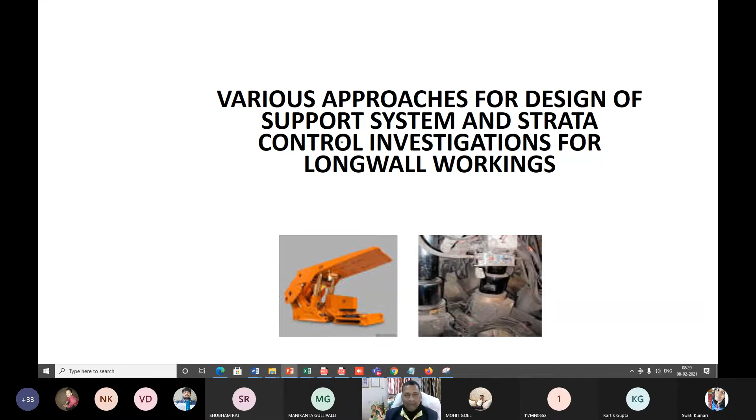I hope you understood. I reiterate and advocate this all the time, so that you get the exact meaning of why we are studying subjects like rock mechanics, geomechanics, or strata control. There are many techniques by which we can design these.

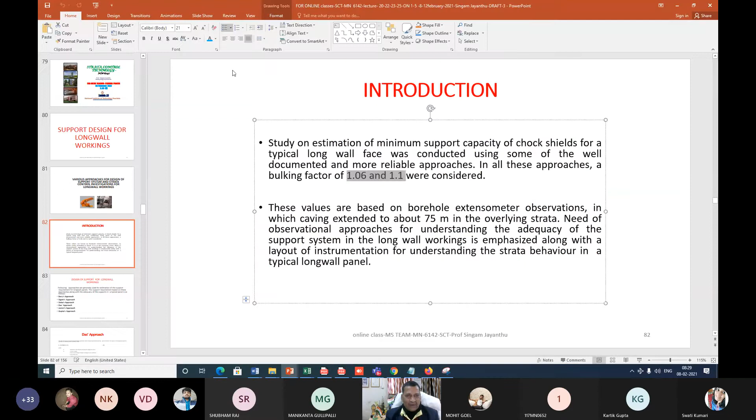But here is the ultimate and main difference. What is the difference between this and other workings, like what you've seen in depillaring workings? There, we considered whether it's rock mass rating or something else. But in longwall mining, whenever there's a problem or an issue of designing the support, it's not like development or depillaring, where there are adjacent panels, adjacent pillars, adjacent remnants, adjacent ribs, adjacent stooks, whatever name you give.

My beloved students of strata control technology, like our Nitesh and everybody, must have understood that meaning—where there are adjacent pillars, they take the load. But in a longwall panel or longwall workings, nothing will be there all along the face; on one side, the total is zero. That means no element will be there.

Everything is being cut—it can be a 200 meter, 300 meter, or 150 meter face length. As the face advances, that is the meaning. I need not draw it again since you already know, as I've shown you with demonstrations. You can understand this: these are the gate roads, this is the goaf, and you are working here. So all the load is supposed to be borne by these elements, or by this face.

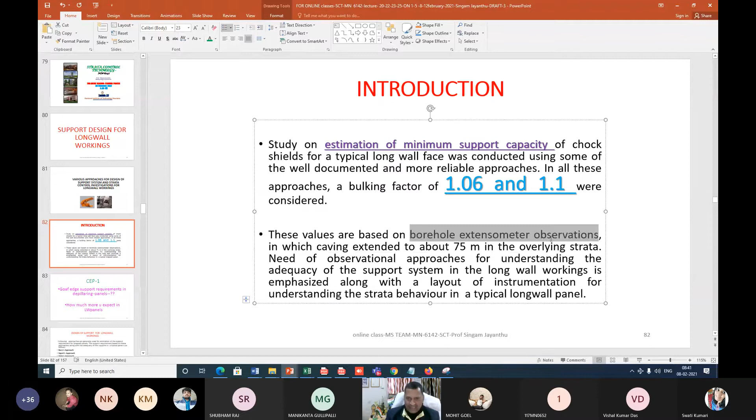Now, these values are based on borehole extensometer observations. You should understand this - these are not just theoretical values or anything, because we have done a lot of investigations on that. Of course, not only us, it was done by so many investigators internationally, and based on that it was observed, and this is what is generally used.

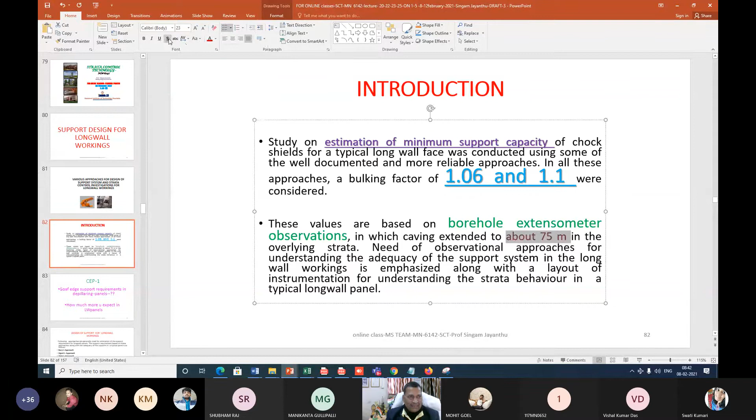Caving height extends even many times, up to 75 meters, when it is around 3 meter height of extraction, whatever it is, observed in different mines. So what is the meaning of this? Very simple to understand now, my beloved students.

Then when I see like this, this is a seam, and then height up to around 75 meter should get disturbed. This is filling this total goaf. That's what is happening. So during that period, at different stages, our chock shield or the support, I told you, will be moving like this, chock shield. Then this is experiencing different loads at different situations of your longwall face, moving face.

So now we should understand that. And when I said bulking factor 1.06 or 1.1, that means that much of load up to that much of height will be acting. Of course, on other sides, there is a side front abutment and side abutment, so many things will be there.

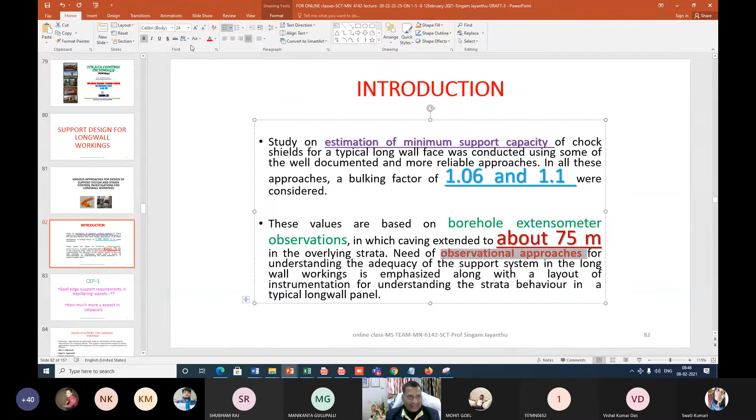Now, and that also we need a lot of observational approaches, and people tried to utilize this. And already I told you, one of our beloved colleague scientist at CMRI, Professor R.N. Gupta Saab, later also he was a director at NIRM, and we were doing a lot of works at that time also. Those things I will be explaining you depending on your interest, of course.

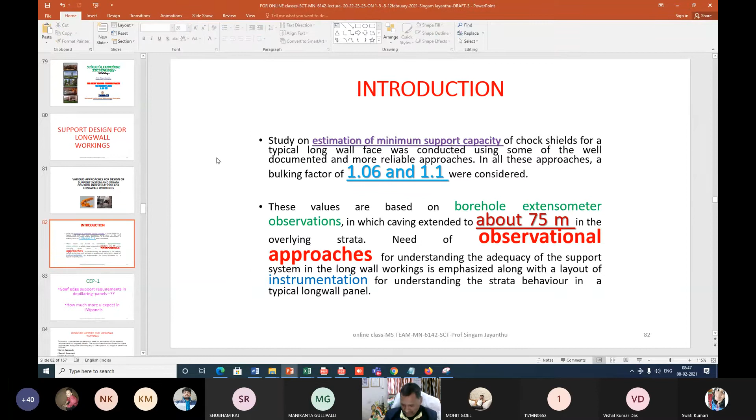But these are all based on observational approaches, utilizing whether it is numerical models and thumb rules, some empirical models developed in other countries, and then a lot of instrumentation done in our country, trying to design or help our industries to give some more better longwall support designs. So with this simple background, let me go a little bit further of whatever already I have asked you.

This is a goaf edge requirement, because in longwall, the main feature is your goaf edge only, right? And these are different approaches that were used. I will not be telling you all these approaches in detail, because I have already given you all these materials, my beloved students.

But before taking a small break, let me show you what materials I have already sent to you. You have all these course materials which I sent as part of a short-term course on recent trends in ground control techniques and organization of strata control cells for mines.

These are all something like books. Of course, at that time we didn't have the habit of publishing in SCI journals or books with ISBN numbers and other things, but this material is there with almost all mining engineers, especially in coal mines.

I have personally given all these course materials to 5-6 subsidiaries, each volume having 400-500 pages, at least 300-400 pages, to so many companies and hundreds of strata control engineers in India and other countries. This one was held during 2012, from 22nd to 25th. All these materials I have given to you, my beloved students.

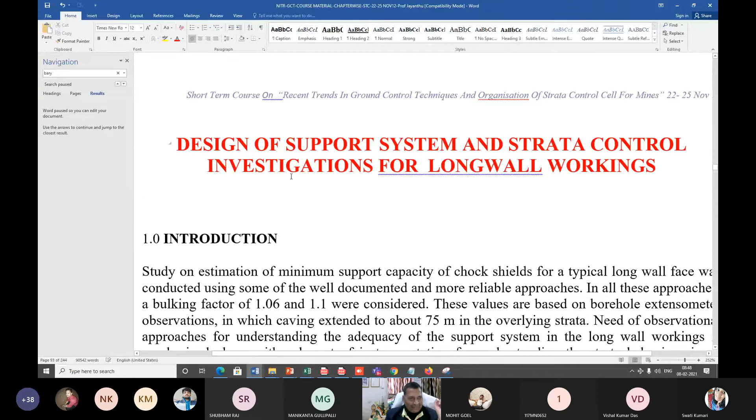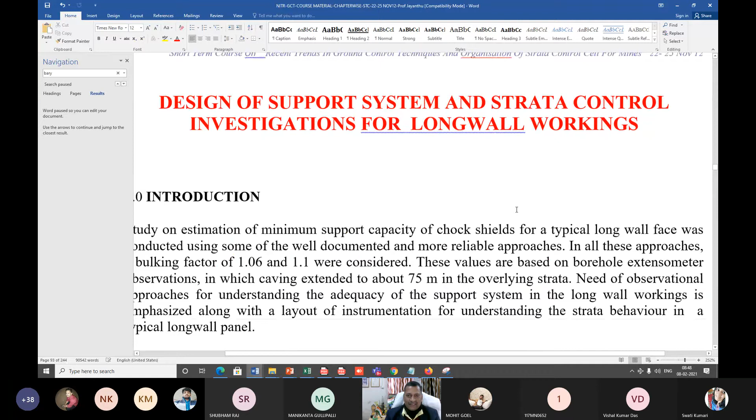Let me also show you the page number, so you can refer to it - this is around page 92, page 93. You can simply refer to this, and it will be easy for us to discuss further instead of reinventing or explaining everything, because you already know how to understand by reading and gaining more knowledge through the literature provided.

Now we concentrate more on interaction, online interaction, even in this COVID-19 period, to understand the present problems of our mining industries. As far as the design of support and strata control investigations for longwall workings are concerned, it is a burning problem for us, a gray area of research.

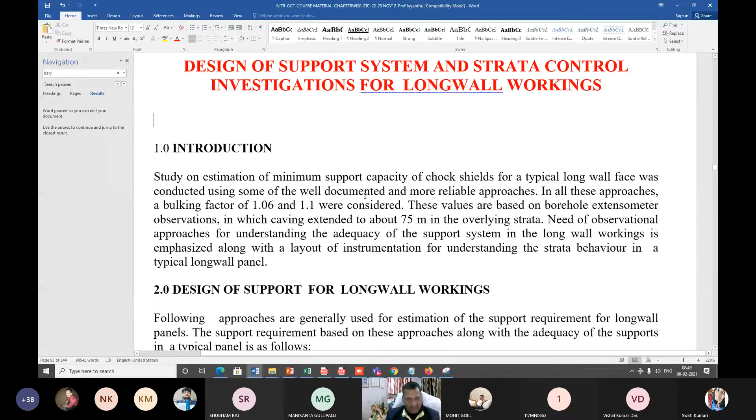That's what I wanted to show before the break. This is what I have given there - what is the Bary approach, its equations, starting from 1969. That's the reason I don't want to go into all these details, but you should understand this as a foundation for why this new research is being done.

Whether it is our premier research institutes like CIMFR, which was CMRI when I was there as a scientist in 1989, or in the 80s and 90s at NIRM - you should understand that foundation.

Then you can do something more, and that's why as part of refreshing you with some literature, I will be telling you, but not in detail. You can read, and if you have doubts, you can definitely ask me anytime. I am available to you, my beloved students.

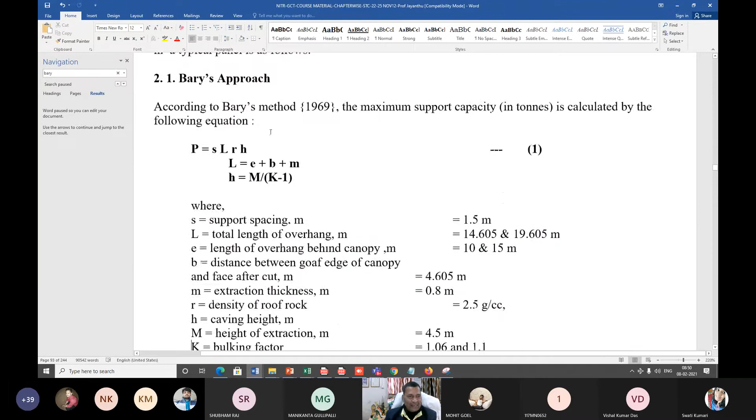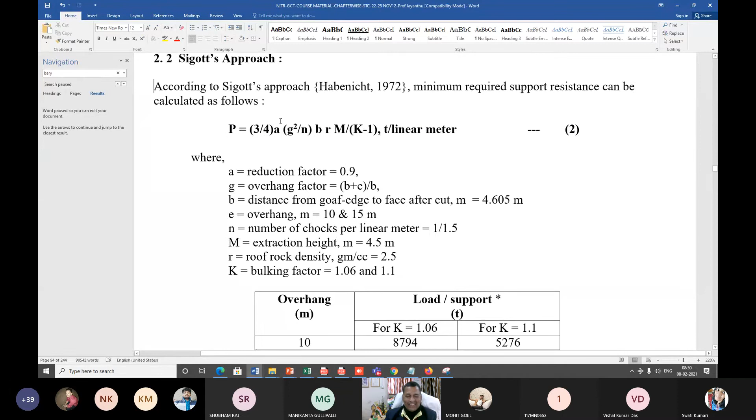So these are different equations already provided from page 92, which I already showed you here, like Bary's approach. You can see I have already given this as part of an international arbitration case study for the Kottadih mines, with some examples. Again, this is not all hypothetical - this is for our Indian conditions.

Some other approaches - Sigott's approach from 1972, then Siska's approach from 1972, and then our Das approach - one of our beloved close friends, Professor S.K. Das Sahab, with whom we were doing a lot of strata control studies in Germany, also at Aachen University. We were there sometime in the early 2000s, right?

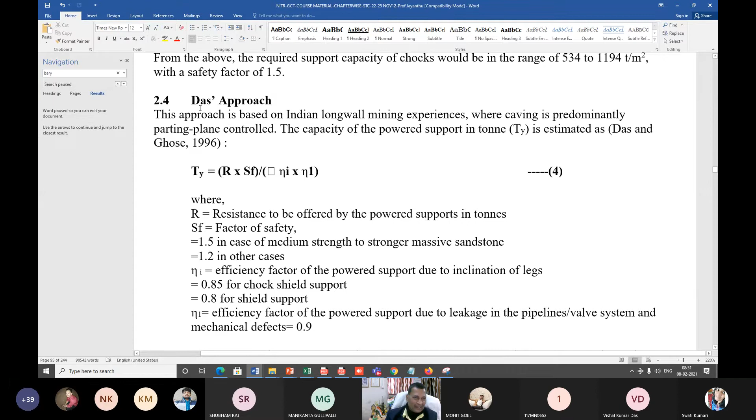He was also the NIT director of NIT Jalandhar. So our beloved friend Dr. S.K. Das, now at IIT Kharagpur, has done very good work as part of his PhD, under the guidance of our professor, the late Professor A.K. Ghose Sahab, in 1996 around that time.

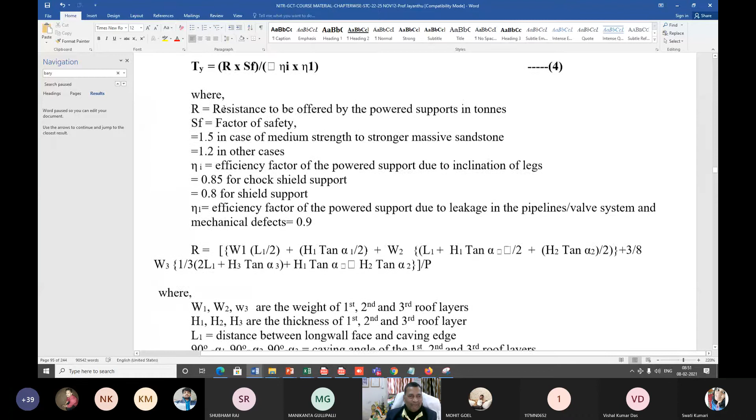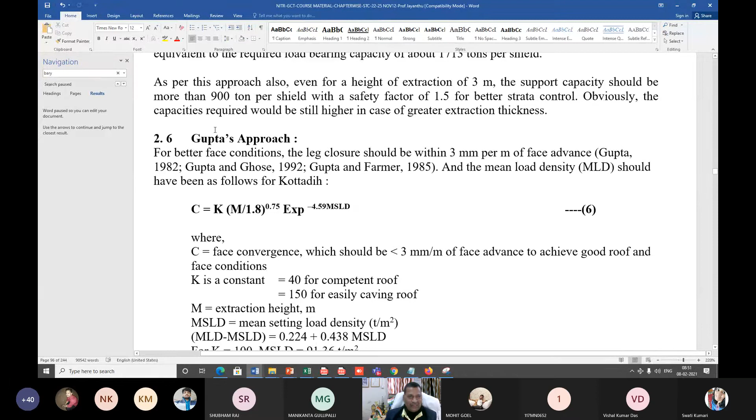So there are many studies done by various people, and other types of approaches like the Joshi approach in '78, and our beloved colleague scientist Professor R.N. Gupta Sahab, who was also director at CIMFR. We worked together for a long time on different strata control and rock mechanics aspects as scientists at CIMFR, Ministry of Mines.

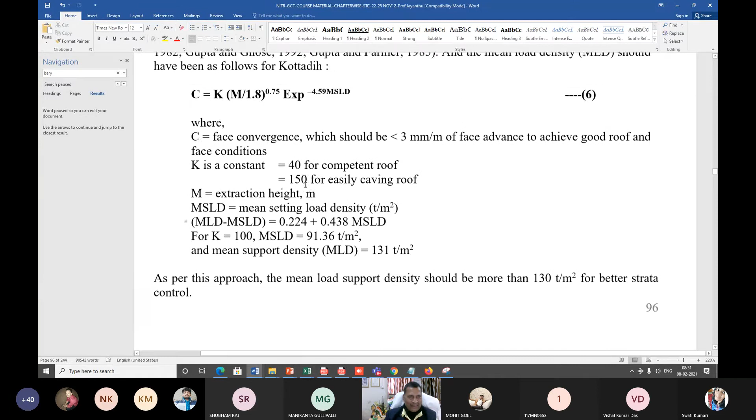All those things are given to you, and of course all these investigations we will take up later, but these are the different approaches we will be discussing. But before that, let us have a small break - any good thing has a break, and that break will motivate us better.

And I could see a very good profile picture of our Deepti Ranjan Acharya. A nice pic, Deepti, very nice.

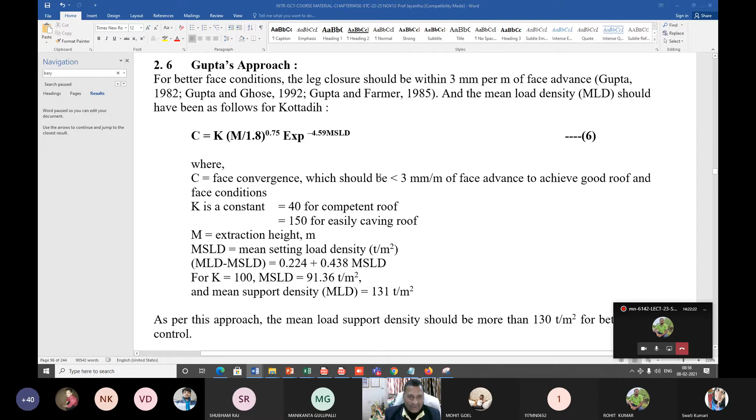Now I am coming to the point of recent information as far as the support designs are concerned. Now you write down about this Gupta's approach, some important points about this. I think now it has come out, otherwise it was moving, rotating here and there. Now it will open, don't worry.

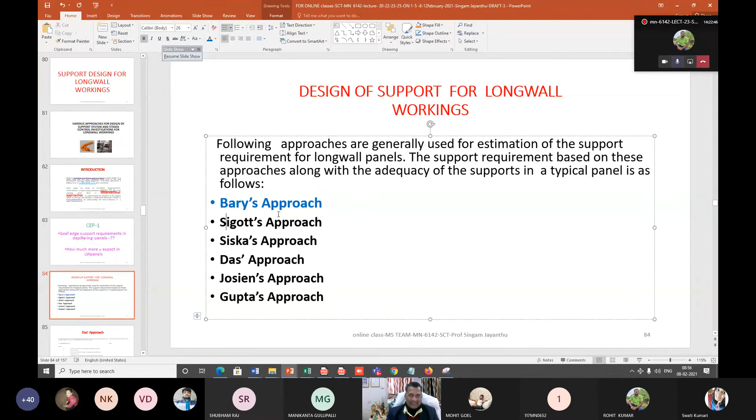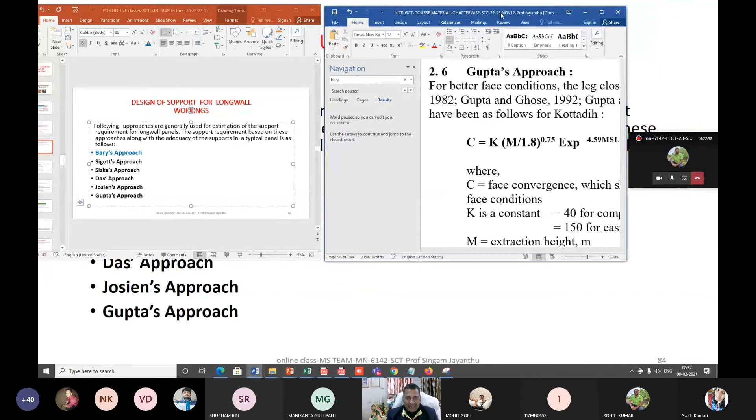So these are the different approaches what we have seen just now - Bary's approach, Sigott's approach, Siska's approach. In all these approaches, as you have seen here, let me keep this information in a different style so it will be easy for us to discuss and collate with the information already supplied to you. Already in the beginning of the course I supplied, and we have hundreds of pages of course materials about this which we conducted in our NIT Rourkela based on the requirements of the industries and DGMS.

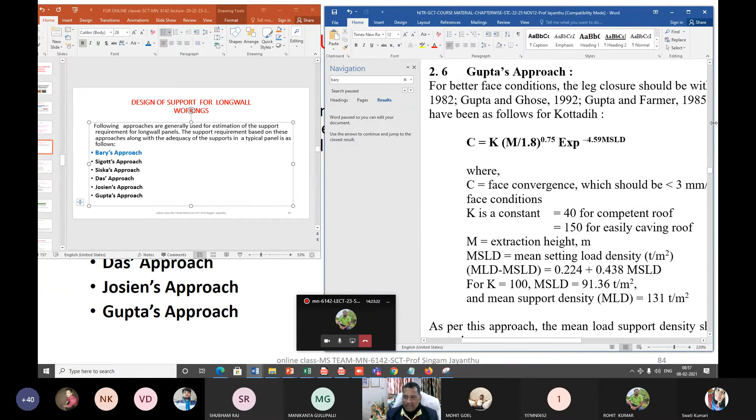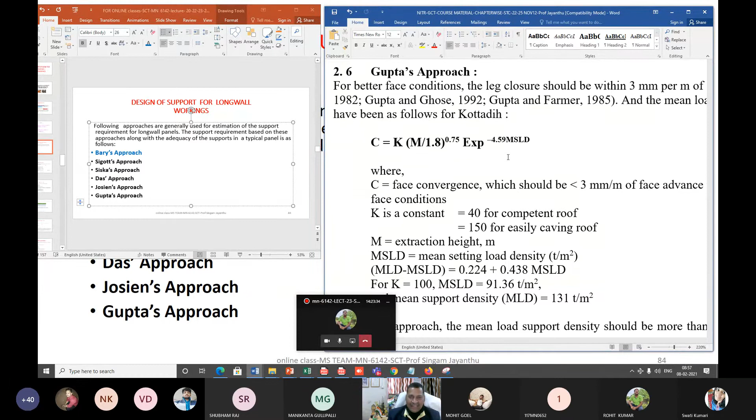Our DGMS recently, Mr. Prabhat was also here witnessing and discussing about these issues for further development of this research or S&T department in DGMS with more insight and reviving that. So that's why I wanted to show this here.

Now in this Bary's approach, Sigott's approach - as I told you, what people thought at that time is it's better when you go to the concept of bulking factor and caving height, up to what height. Bulking factor in turn gives, when there is a panel - if I am keeping it like this, now as a section when you see, over this if it is getting disturbed up to a certain height, then we consider that height to be something like this, okay.

So this much of height in the roof should get disturbed to fill this much of the 3 meter, whatever is 3, 4, 5, what is the height of the extraction. Just imagine, at the time of major fall, instead of like this, this is a total overlying strata and this is my surface. In this, there may be different caving height based on the bulking factor, maybe up to this.

So that's why I folded it here, up to this. This is 75 meter, 40 meter, 30 meter, whatever it is over the panel. And of course, some more height is also there, but that need not get disturbed to fill this gap. That is the meaning of this.

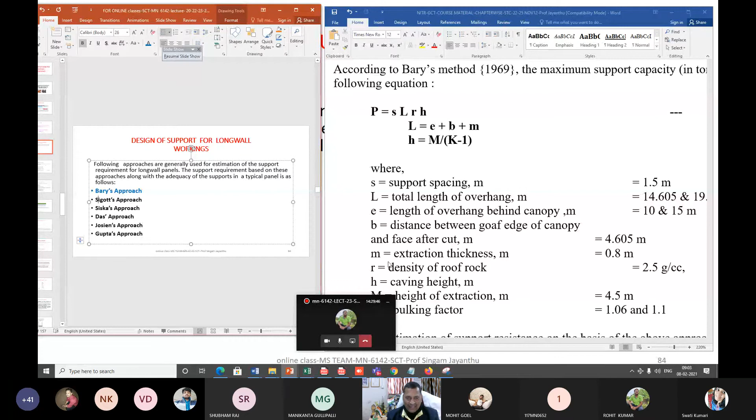Now you understood it, right? So L is the total length of overhang, and E is the length of overhang behind the canopy, and the distance between the goaf edge and the canopy, you understood already, right? And face after cut is around 4.6, that is the meaning of that. And the density of the rock is 2.5 grams per cc, and extraction caving height is based on that only.

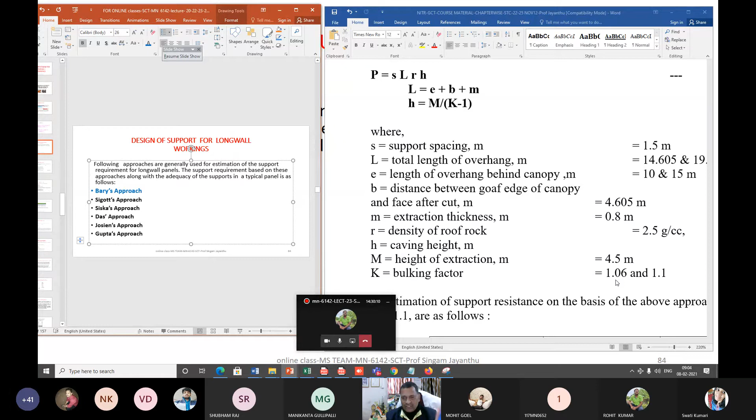Height of extraction for 4.5 meters, then with a bulking factor for the worst situation and the best situation we have given 1.06 and 1.1 respectively. I will explain it for 5 more minutes, then we will take up CEP questions and answers.

Now, details of estimation of support resistance on the basis of this above data. Now you see, my beloved students, when I estimate that with a bulking factor of 1.06, 1.1, with a caving height of 45 meters, that is sufficient for this total goaf to be filled. That is what the caving height is, which is calculated based on the bulking factor. I hope you understood it.

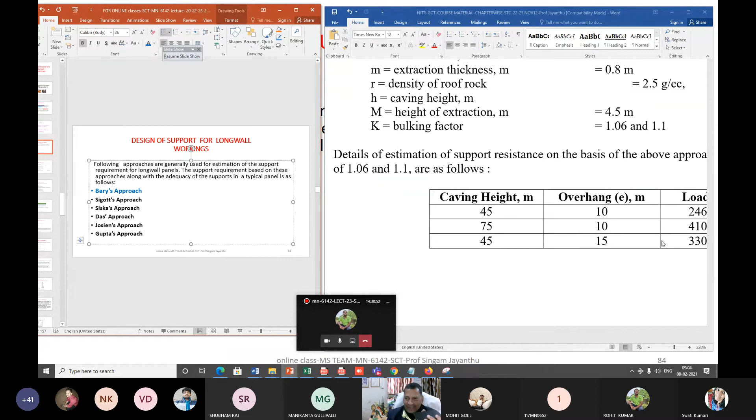And this overhang of 10 meters, 15 meters, we have observed in the mines, so that's what we have given here. So with that, how much load is acting? Here, around 2,465 tons of load will come on the support. When the caving height is more, like 75 meters with an overhang of 10 meters, then the load acting will be around 4,000 tons.

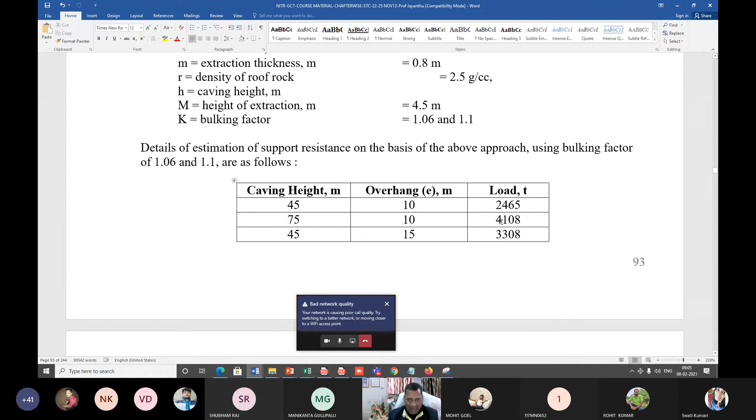4,000 tons. Now you know very well our chock capacities, whatever they are. You can understand with 75 meters, with 15 meter overhang, then it is around 5,000.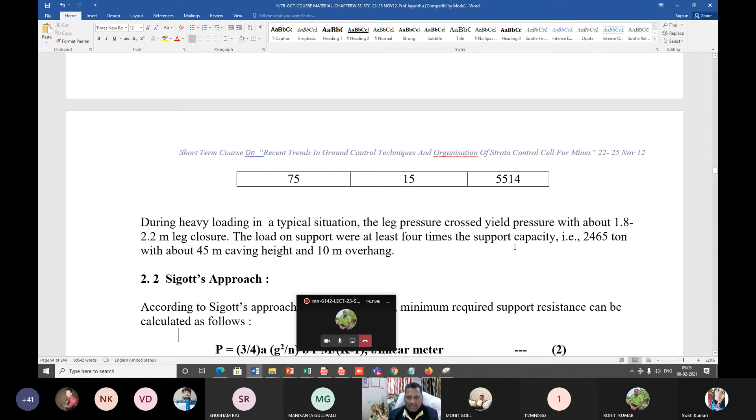Now you see, during heavy loading in these typical situations, leg pressure crossed yield pressure with about 1.8 to 2.2 meter leg closure. These are observations from different mines. The load on the support was at least 4 times the support capacity, that is 2,465 tons, whatever is there, with about 45 meter caving height and 10 meter overhang.

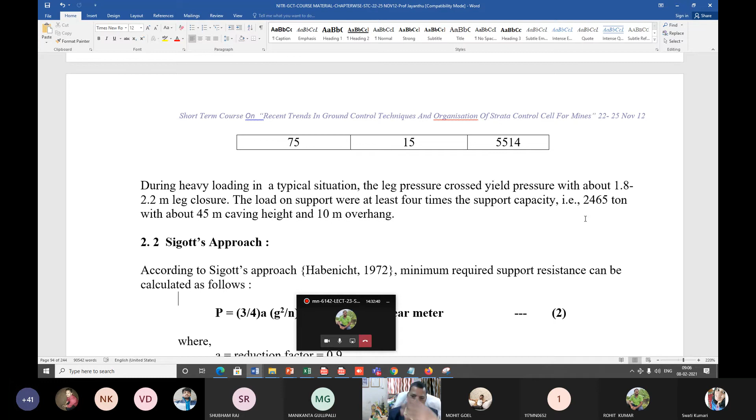Otherwise, till now we have supports designed by our beloved mechanical engineers up to about 1,000 or 1,200 tons. Now we are using around 750 tons capacity supports at present, operated up to about 800 tons. Even in our Adriyala and other Longwall projects we were doing like that, and in Australia and other places people went up to around 1,000, 1,200. So when that is the capacity we can design as mechanical engineers, if the requirement is around 2,000, can you imagine that you cannot work? But that is not the case. These are different approaches, that is the reason I am trying to explain to you, my beloved students.

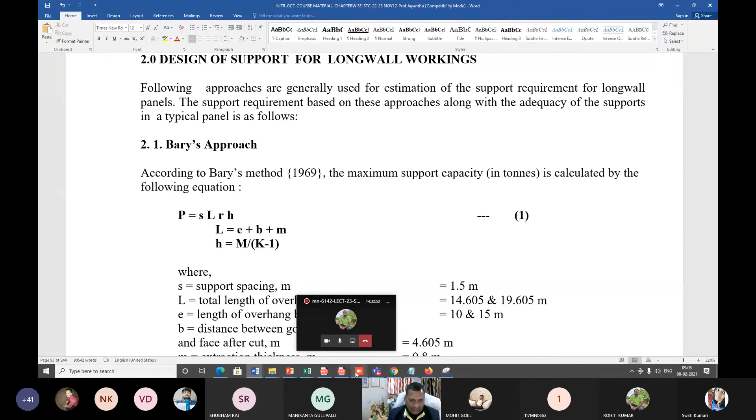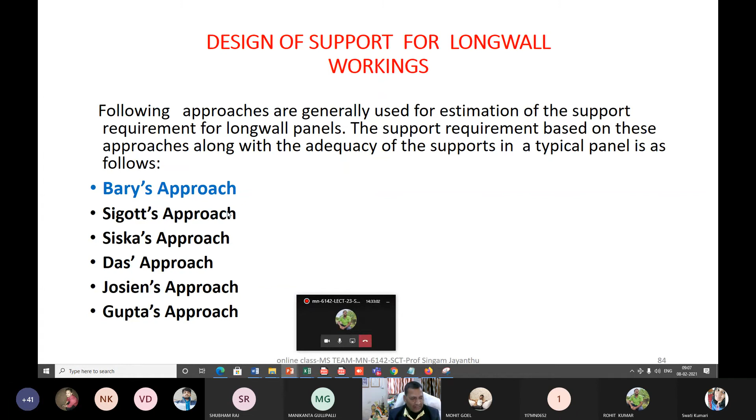And of course, this discussion we will continue in our further classes also, in the next classes. Now it is 8:55, so we will go further with another simple CEP question. Next one, CEP2. That CEP2 should again be very simple for you, my beloved students.

So CEP2 should be, now what should be the caving height? Now you are planning for even 5 meter, 5.5 meter. Just imagine, I am giving you a hypothetical case: if you are extracting even 6 meter height of extraction, with the overhang, let us leave all other overhang and other things aside, what is the caving height in similar situations, other similar geomining situations? I hope you understood this.

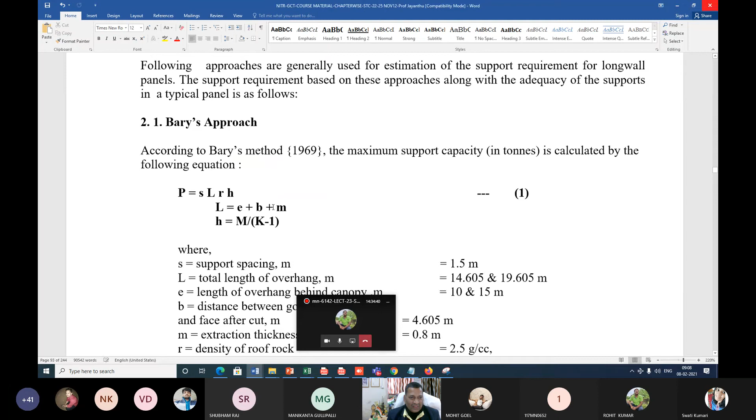Now, whatever I explained is for the caving height of 4.5 meter. Let me also show once again, my beloved students, what I was trying to show you. Let us not go to this. This was for a caving height of extraction of 4.5 meters.

Now you note down this equation. P is equal to S, L, R, H, and these things we already discussed. L is equal to E plus B plus M, and H is equal to M by K minus 1. This K is a bulking factor, and M is height of extraction.

And now this height of extraction, if it is around 6 meter, then you can also estimate and calculate what will be the caving height. And based on this approach, Bary's approach, what could be the support capacity required. But that may not be 100% right. Different investigators proposed different methods.

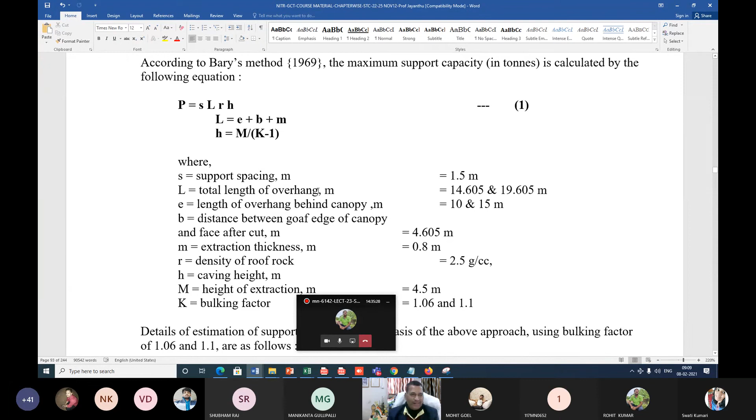Tomorrow our Nitesh 2021 may give some new approach. Our Ava Madam 2021-22 may give her equations based on her excellent PhD done on these supports in Mahanadi Coalfields, as a senior executive there. So this is the way how we do that, and that is what I wish to contribute from your side, for your Make in India, Atmanirbhar Bharat.

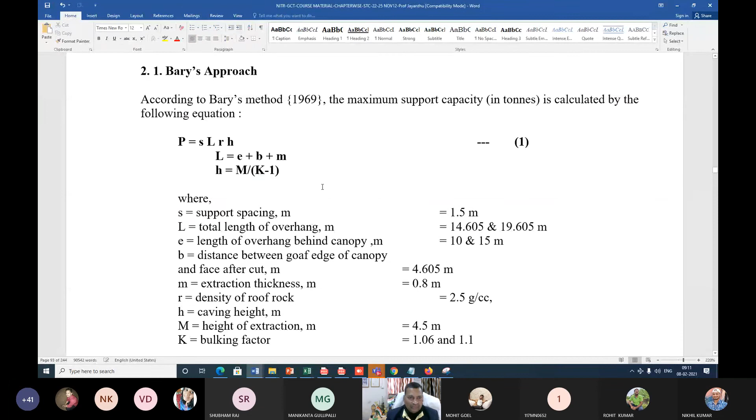So in a similar way, now also we can calculate with any other assumptions or similar conditions what is the bulking factor and then their overhangs. That is only one approach I explained today, but that is not 100% right. Again, I am telling you, my beloved students of Strata Control Technology.